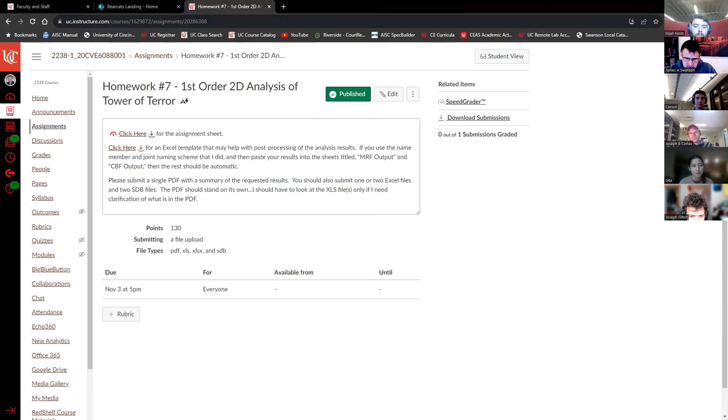There it is. And so with this worksheet, it's set up so that if you do your analysis and you name your members the way that I wanted you to, then all you have to do is paste the data in the appropriate sheets here at the bottom. Let me see, here we go, moment frame output. So you can paste your data into this sheet from the moment frames. And the next one is concentrically braced frame output, CBF output.

So if you name your joints and your members the same way and output the data the right way, then you can paste your output into these 2 sheets here, and that will basically sort all the information for you. And so I've got results due to dead load, curtain wall, snow, live, and wind in the X direction. And then I have the load combinations that I want you to consider.

And then the envelope, and the envelope is presented 2 different ways. First, it's in kips and feet units, and then kip and inch units. And it's convenient to have both of them. And then some joint output that calculates the drift ratios and things like that. And so as you're working through your assignment, it might be worth taking a few extra minutes to number your nodes and your members the same way that I did, so that you can save some time on the back end with your post-processing.

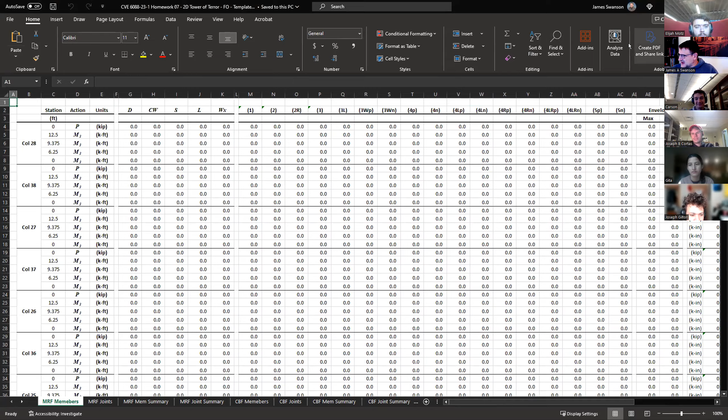Okay. Well, that being said, what I wanted to do today is pick up where we left off last time with our continuum elements, and then I'm going to go back to SAP 2000 and put some shell elements in that model and show you how to basically put in the gravity loads. And then if there's any time left over, we might launch ETABS and start working in there as well.

So looking ahead at our schedule, my goal for Thursday is to talk about matrix analysis of frames. So that'll be our last matrix conversation. And I wanted to get that in before our exam. One of the exam questions that I like to ask is, calculate equivalent end actions. And if we do that for a frame, that's a little bit more interesting than doing it just for a beam. And so I wanted to get that in before the week of the 13th.

Remember, next week, the 7th is a reading day for us, so we won't meet that day. And then after this week, we have one more class before our take-home exam. So that's on the 9th, and I plan to answer some questions you might have then, and then cover some ETABS material. And then we have our exam, and then basically 2 or 3 more classes after that, and we're done. So the month of November goes fast.

All right, so let's see. We were working in this presentation here. Okay, we were working on continuum elements in SAP 2000. We talked about the differences between plane stress and plane strain elements. The idea that these elements come in either 3-node triangles or 4-node quadrilaterals. There's different variations of those, so you can actually have a 6-node triangle or an 8-node quadrilateral or even a 9-node quadrilateral that have different types of shape functions built in, different formulations buried behind them.

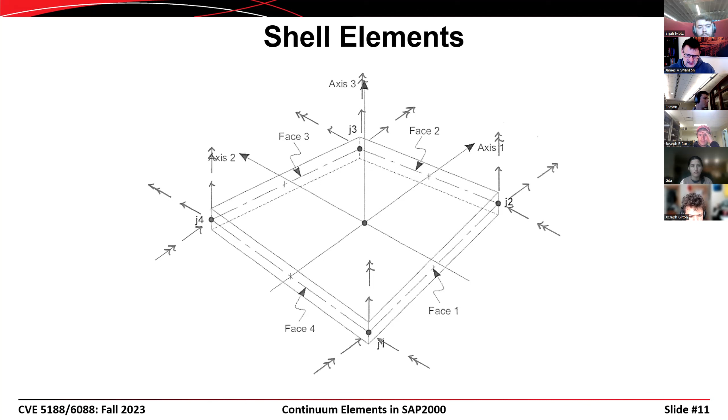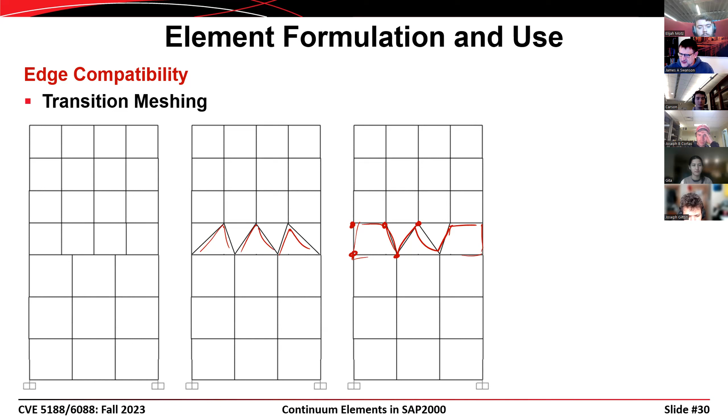All right, so we had talked about the idea that there has to be some transitioning in the meshing in order for this to work. The only place where these continuum elements are actually connected to each other is where they have common nodes. And so you need to have a transition mesh between the 2 different regions of the model in order to have continuity of action.

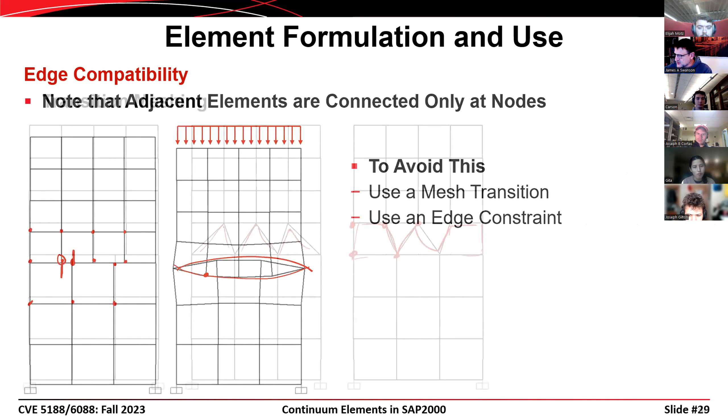So if we were to go in and push down on the top of this, then what you end up with is overlapping between these 2, because this shell element up here isn't connected to the shell element down here, except at that one node. So you have a node here on the top, a node here on the bottom, and those aren't connected to each other. And so we can use a transition mesh like that, or we can use an edge constraint like this. And those edge constraints are handy because they allow us to just define a set of joint constraints that accommodate the transition mesh.

The transition mesh is a little bit more costly in terms of time because you have to go through and do that manually. You can't always get Abaqus or SAP or ANSYS or whatever to get that transition mesh for you automatically.

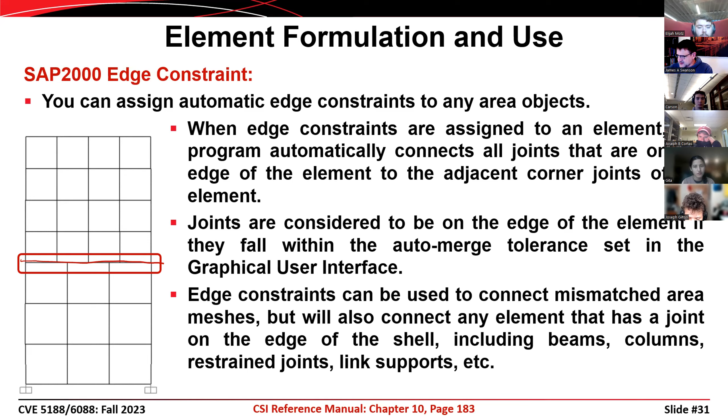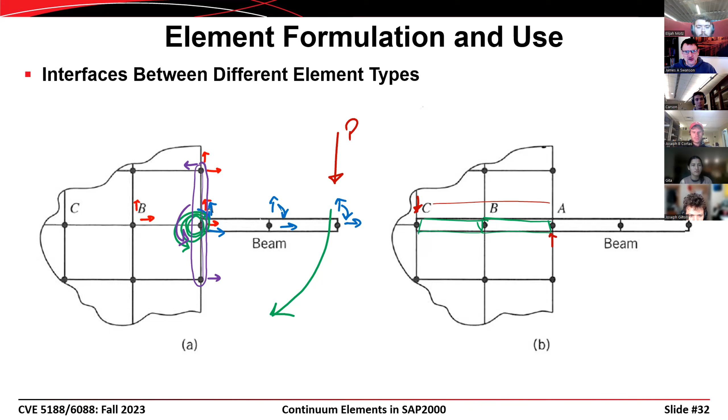Probably one of those things where it won't really click until you actually are faced with that situation. But if you come up against that kind of a situation, bear in mind that's an issue that you have to work around with these.

So when we go and use these continuum elements in SAP 2000, we're going to use most often area elements. So the beams and the columns that we've been drawing, those are frame objects or linear objects. And what we're going to do now is use area objects. Like we take a linear object and automatically mesh it into a number of frame elements, we're going to take an area object and automatically mesh it into a bunch of shell elements. So an area object can be larger, and then you can set the automatic meshing so that it's meshed into a number of smaller shell elements.

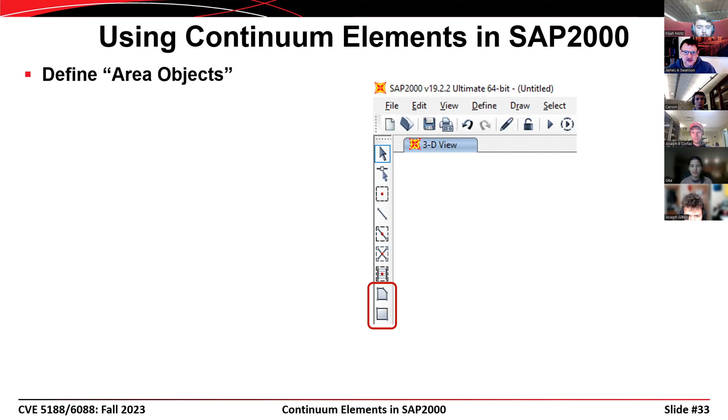And so the area objects are on the toolbar and they look like that. The first one is for an irregular area object, and the second one is for a rectangular area object. Occasionally you end up with an irregular shape depending on the particular geometry of the structure you're modeling. You also have to define the area sections, much like when we define a frame object, we have to tell it whether it's a W36 by 150, or maybe it's a rectangular concrete beam, 18 inches by 12 inches. You have to do the same thing for the shells as well.

And so you go into the define menu, section properties, you go to area sections, and then it gives you a window that looks like this. You can define the area as either a shell, a plane, or an axisymmetric solid, and that's what those three options are for. We talked about these different types of elements that exist under the idea of continuum elements. And we're almost always going to use a shell element when we do our modeling.

In the past, in this class, I played around with modeling a dam cross-section with plane elements, but it's kind of a right turn from what we are doing with buildings and bridges, and so it doesn't really fit in well with the cadence of the class. And then we always run out of time anyway, so I haven't done that in the last couple of years.

Another option would be you could actually model a wide flange beam using shell elements. You use a series of shells for the top flange, a series of shells for the web, then another series of shells for the bottom flange, and you can get a high resolution model of a beam using those shell elements. And there are some applications where that's preferable, but that's pushing SAP to its limits with respect to doing continuum modeling. If you're going to do that type of work, you're probably better served going into something like Abaqus or ANSYS instead. All right, so second step is to define the area sections.

Okay, the next is to assign the area section to the area objects. So you define where you want the shells to be, you define what you want the shells to be, and then you assign the shell section definition to the area object definition. That's rather intuitive after you've been working with SAP and you understand that you have to assign a section to all the frame objects as well.

Then the next step is important. It's not strictly required, but in almost every case you would want to do something with automatic meshing associated with the area objects. So when we go and look at a framing system for a building, the beams might be spaced at 12 feet, and you certainly wouldn't want to have a shell element that has dimensions of 12 feet by 32 feet. One element that's that large isn't going to give you the analytical results that you're looking for.

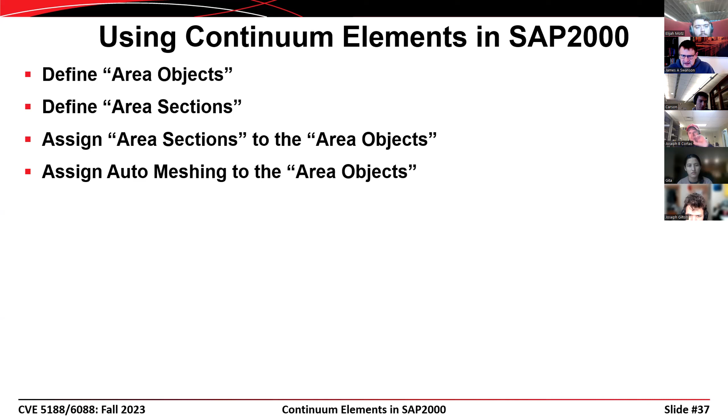What you're going to want to do is break that up into a number of smaller elements, and in order to do that and do it conveniently, you'll want to use the automatic meshing. And so you set that much like you do automatic meshing for a frame element. You go to the assign menu, you go to the area, and then you go to automatic area mesh.

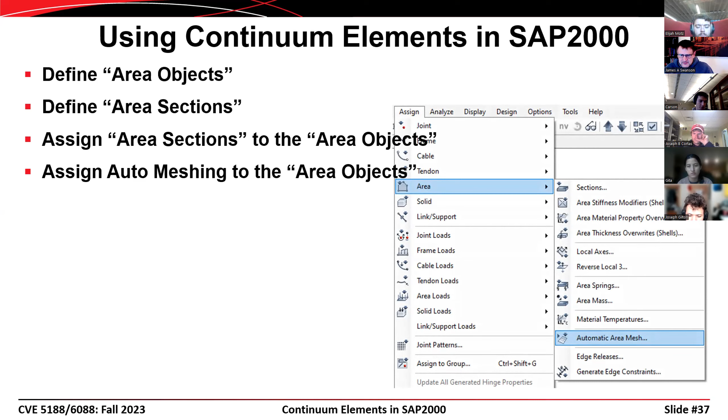Now, when you look at the dialog box that comes up, it's very involved. And there's a whole 2, 3, 4 page handout that I have that I'll give you on this. But I should have posted it before class, but I forgot about it.

But in almost every case, if you select these options here, that gives you usually the results that you want. I use the cookie cut based on straight line objects that are in the meshing groups, and I extend all the straight line objects to the area edges. And so what that does, if you window over an area object over the floor framing at a given level in a building, it'll automatically mesh that area object so that the edges of the resulting elements line up with the beams that are in that floor slab. And so that's usually what you want.

And then I also have a sub mesh option over here, rather arbitrarily. In this case, I've selected that I want elements that are no larger than 12 inches by 12 inches. And so that's not a bad number. If I have floor beams spaced at 12 feet, like I do in the Tower of Terror, then that's going to give me 12 shell elements between each floor beam. That's not a lot, but it's not too few either.

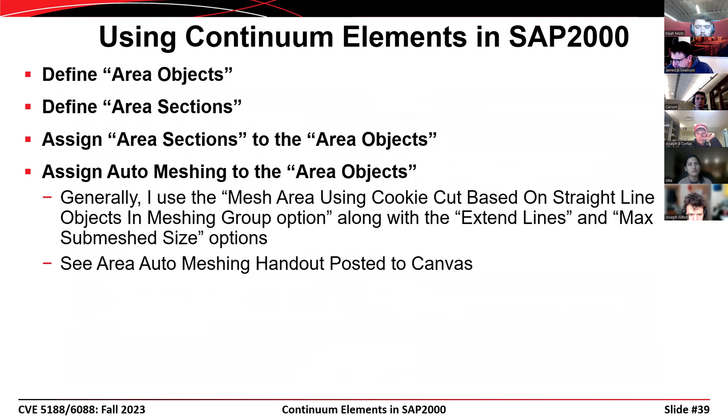If we were looking for behavior of the deck itself, we might want a higher resolution mesh. But since we're not really looking for the behavior of the deck, instead we're looking for the loads that are in the steel members, then using a mesh that is rather coarse is satisfactory for that particular objective. Right, so there's the automatic meshing that I use. Yeah, I'll post that. I forgot to post it before class.

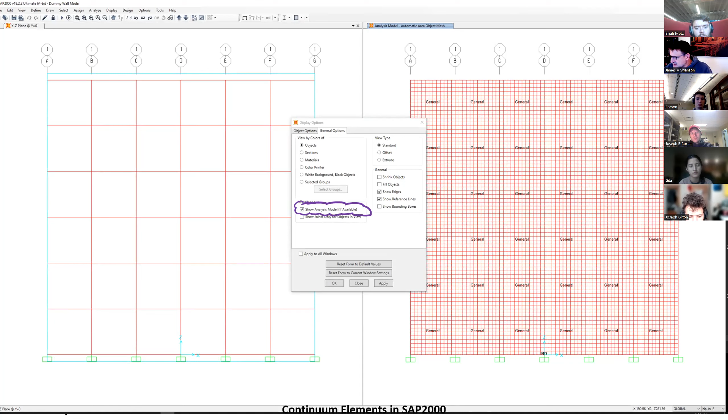And so the idea is if we go in and window over a series of members like this, then we can automatically mesh it and get it to pop up with the straight line objects. Now, there's a difference between the model that we use for design and the model that is used for analysis. And so if you want to see what type of automatic meshing is going to happen, then you go to your display options dialog box and show the analysis model, and then it'll go through the automatic meshing. Right. Yeah, and there's that.

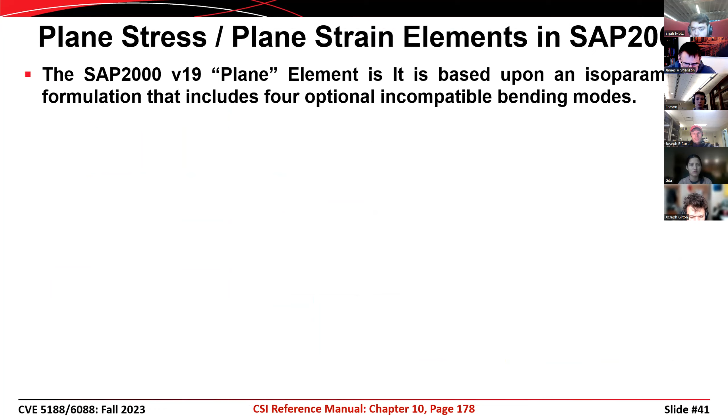All right, now let me skip over this for now. The plane stress and the plane strain elements, I don't think we need to cover those. Yeah, here's one. I did do a model of a shear wall with these plane stress, plane strain elements. I guess I'll cover them just to be complete, but I'll cover them quickly.

Okay, so the plane stress, plane strain elements, they have a use when you're modeling things like walls, or maybe you want to do a model of a beam and you want to look at the stresses in the beam. And in this case, you could actually look at stresses that are based on the finite element formulation instead of stresses that are based on Bernoulli bending or Euler bending instead.

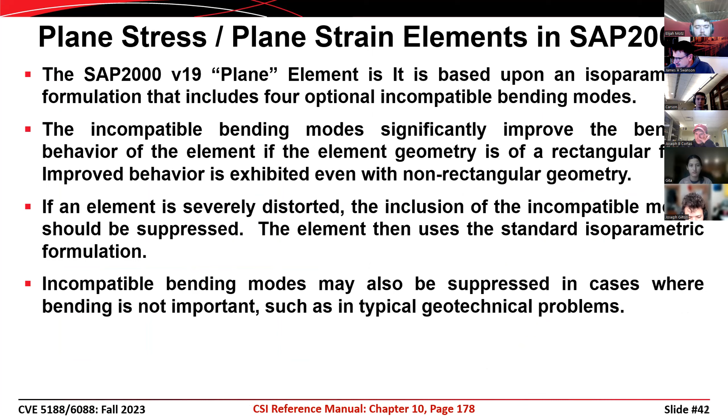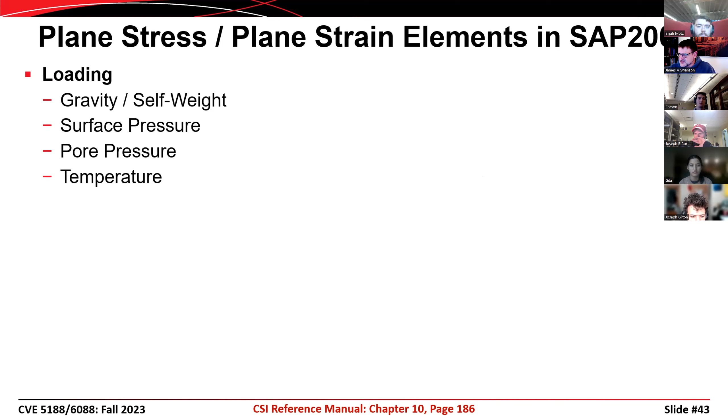And so there's an option for including incompatible modes. When you look at a beam that's made up out of these plane stress, plane strain elements, you end up with a propensity to have shear locking involved with them, and that's where the incompatible modes come into play. Plane stress and plane strain elements have loading that can consist of self-weight or gravity, surface pressures, pore pressures, or temperature. And you can also put point loads at the joints that are within the model.

The output is based on 2x2 numerical integration, Gauss quadrature that I mentioned last time, and it gives you stresses in the local element coordinate systems. So you get in-plane stresses in the 1,1 direction or the 2,2 direction. Those are sigma values, normal stresses, so that would be sigma 1,1 or sigma 2,2. You also get a shear stress that would be tau 1,2. And they use S for all three of them, so you have to be familiar with the notation.

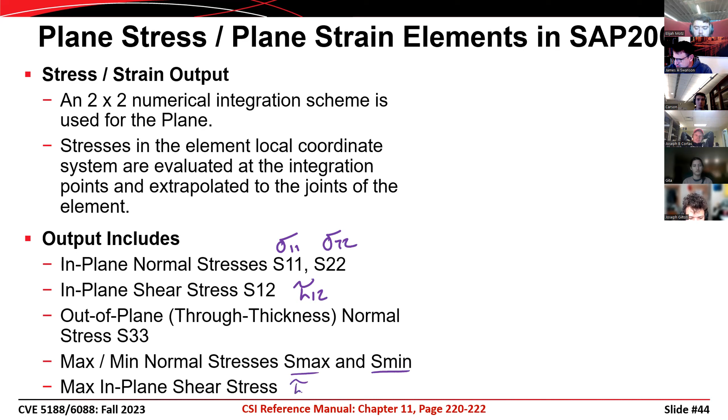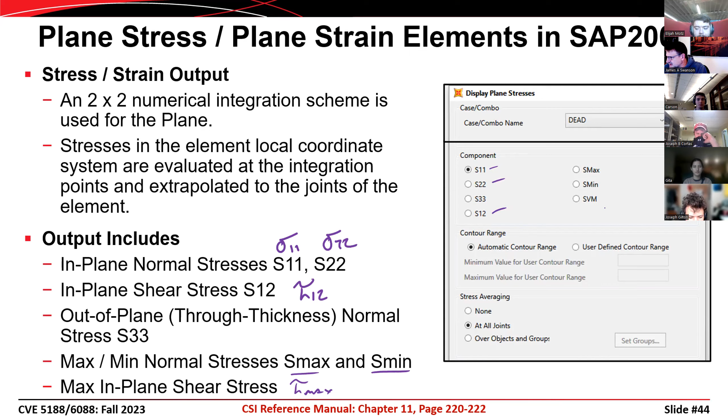You also get an out of plane stress in some cases, depending on whether you're using plane stress or plane strain. And then you can also output the maximum and the minimum stresses as well, or the maximum shear stress too. So here's the output definition: sigma 1,1, sigma 2,2, tau 1,2, S min, S max, and then the maximum shear stress.

And those values are based on a Mohr's circle analysis of the state of stress that's in each one of the elements. And so you might have a value where this is sigma 1,1, tau 1,2. This might be sigma 2,2, tau 2,1. And then the maximum stress is here, the minimum stress is there, and then the maximum shear stress would be up there.

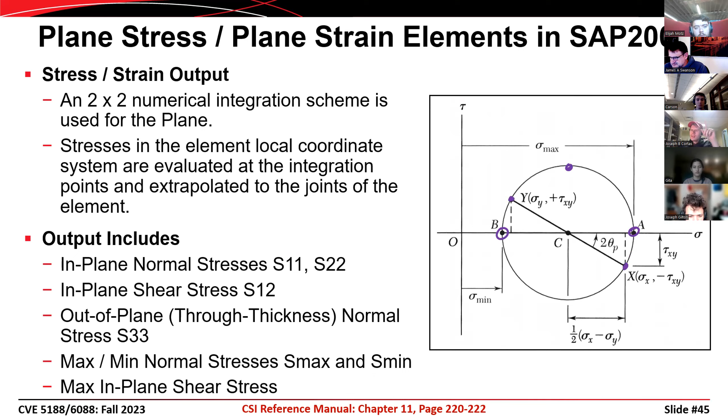All right, here's the shell element formulation. You can have a 3 or a 4 node formulation. The 4 node element does not have to be planar. You could have the 4 nodes out of the same plane, but it shouldn't be too far out of that plane in order to give good performance. Each element can be loaded by gravity or uniform loads in any direction, surface pressure, or strain or temperature change. There's also a uniform to frame option that's available for the shell elements that's very useful.

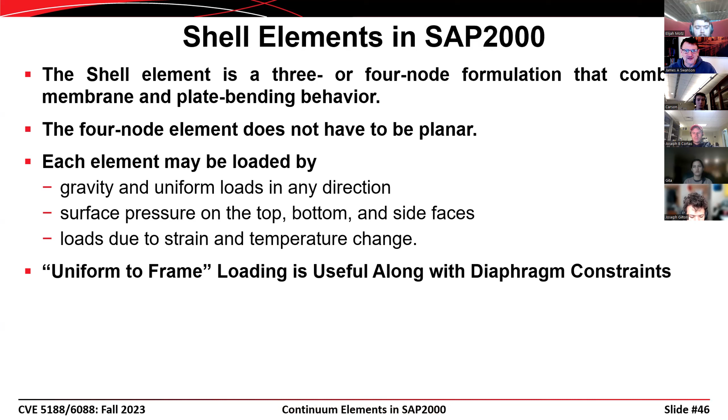In a lot of cases, we don't necessarily need the shell elements in the model to try and capture some behavior. We just want the shell elements so we can put the gravity loads on there. So we can put the dead load from the floor, or the snow load, or the live load from the floor on there. And in that case, a uniform to frame loading option is very, very useful to us.

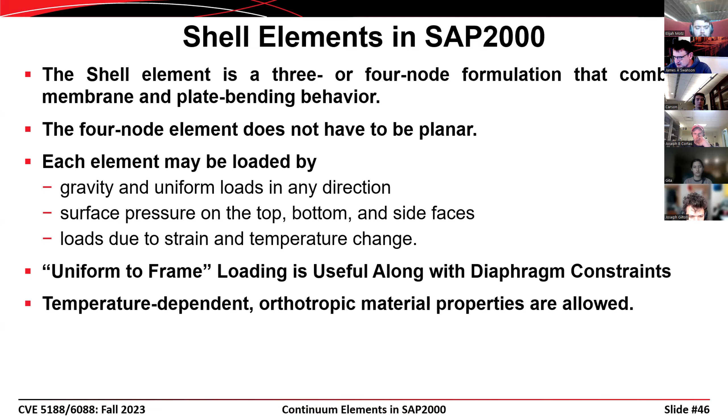And when you define the way the loads are distributed, you have to know whether the 1 axis is perpendicular to or parallel to the members that are supporting the shells. And if you get it wrong, then the behavior that you're expecting might be different than what you get. Excuse me.

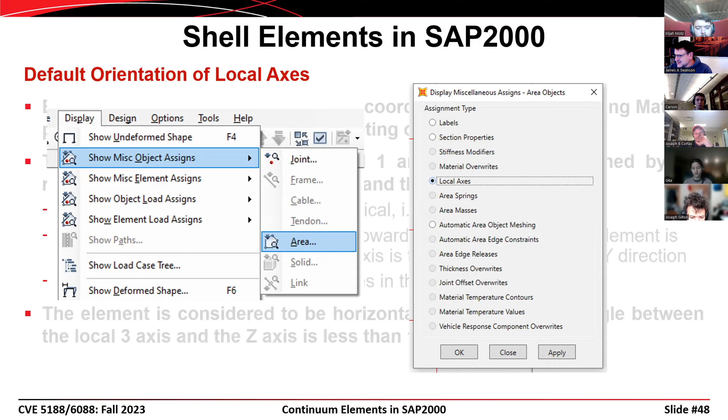All right. So if you want to show the local axes, I think we talked about this in the context of frame objects, but in area objects, you can go to the display options, show miscellaneous assignments, and then go to the area objects, and you can show the local axes. And so it shows a series of red, white, and blue axes. In this case here, I've got a wall that I modeled. Red, white, and blue corresponds to 1, 2, and 3. They can't show a white, so it's red, green, and blue instead. So this would be the local 1 axis here, this would be the local 2 axis, and then the 3 axis is coming out of plane.

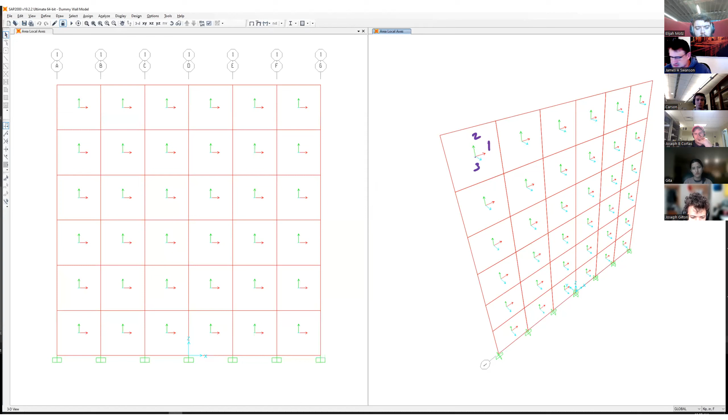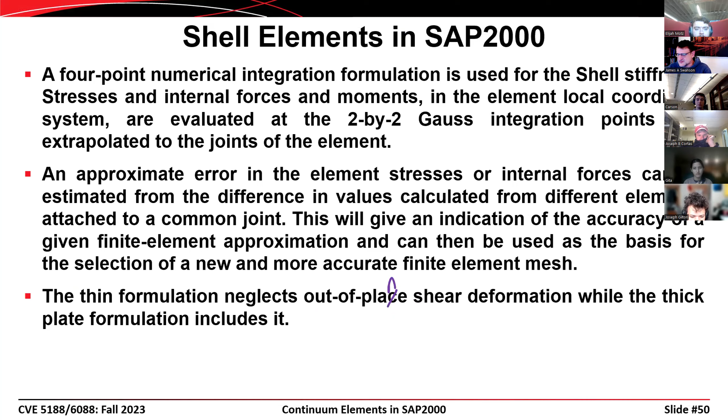Most buildings have a rather thin floor slab, something in the order of 6 or 8 inches. Maybe if you get into a bridge deck where you have like a 12-inch or 16-inch thick bridge deck, that would be very thick even by today's standards. Then maybe that would be a case to include it. But probably in most cases, we can ignore that.

Then you have the homogeneous versus the layered. And this is a reference to that watch and learn that I mentioned earlier. You can use a layered shell element formulation to model shear walls.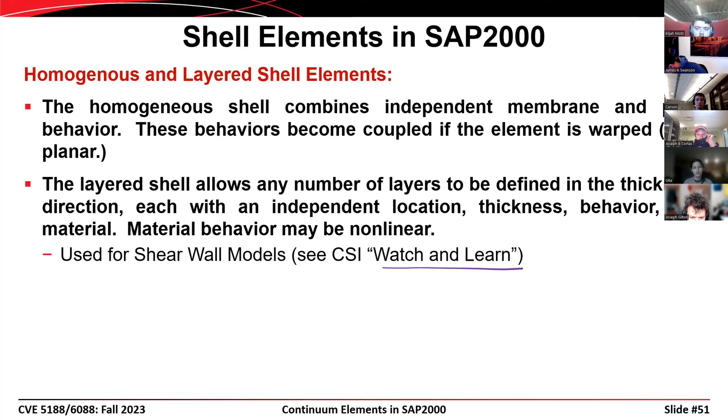All right, so what I want to do at this point then is shift gears, change computers, and go over to SAP 2000. So that'll take just a minute. You can go over here. Share that window. There we go. And there is the model that I have of the Tower of Terror. All right. So this is basically where we left off last time. So I'm looking at the first story of framing. So that's floor 2 right there.

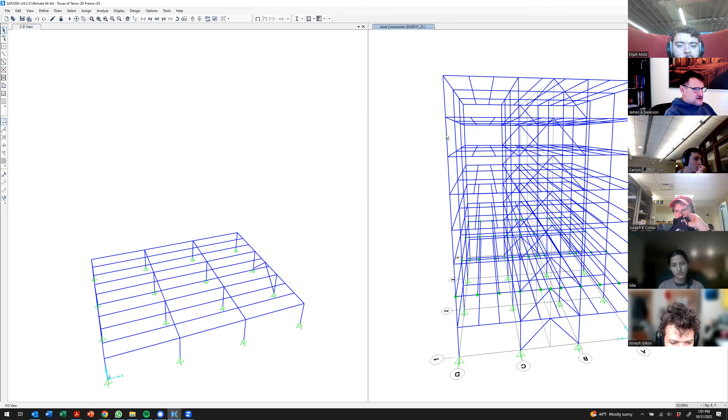Let me actually go over here in the window on the right. And what I'm going to do is take a look at the second floor framing plan in a 2-dimensional view. So I'm going to go over here on the right. I'm going to go to view, set a 2D view. I want to look at the XY plane at Z equals, I could type in 12.5 feet, or I could just click there. That's the second floor framing. I hit apply, and then there's the second floor framing for me.

All right, so I've got to do 2 things. I've got to define the geometry of the shells. I've got to define the section of the shells. I'm going to define the section first, because then I can assign that section to the area objects when I draw them. So let me go to define areas. I'll say I want a new shell element. Let's call this floor slab.

And so I'm going to use a thin shell element formulation. Let me go ahead and use a membrane thickness of 0.5 feet, a bending thickness of 0.5 feet, and I'll just keep this material that I have here. Using concrete, normal weight concrete is satisfactory. And I think everything else will be fine from there.

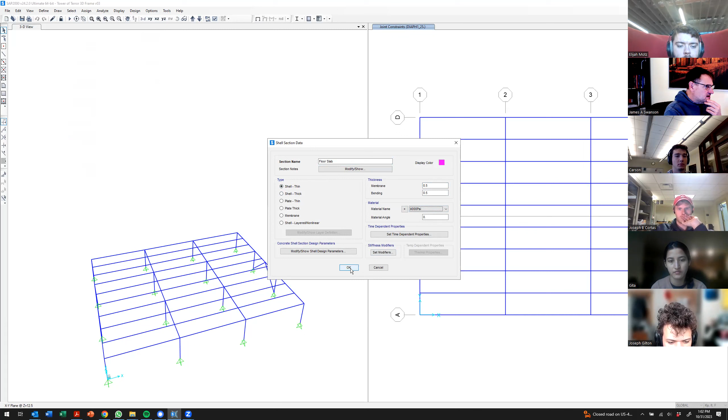Okay, hit OK. Now what I can do is I'm going to draw one area object that represents the entire floor at that level. So I go in like this. I'm going to draw it from upper right to upper left to lower right. And you can see that area object there. It's outlined in red. And then I'll hit escape to exit out of that.

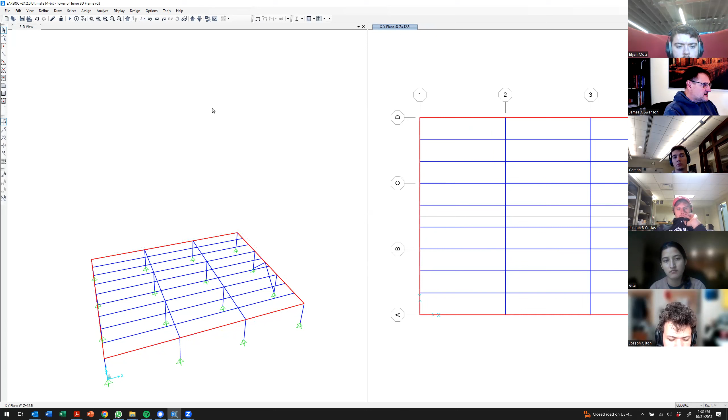Now, if you want to see that area object a little bit better, what you can do is go in here and go to fill objects. And so now it fills in that area object with red, so you can see it there. Or you can go in here and shrink that object so that you can see it's actually shrunk down from its edges. It's hard to see those area objects sometimes. You can also go in here under areas. You can put the labels in there as well, which sometimes helps.

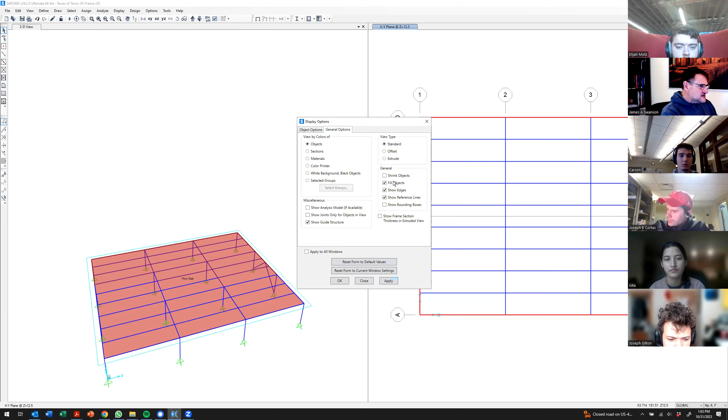So that's area object number 1. We can put the sections in there. So that's floor slab. Or we can go over here and I can draw the local axes, and that will be helpful. So let me not fill that object. And so now the one direction is parallel to the joists that are in there. Now, let's see. I want to check one thing. I'm going to go up here and go to the documentation. And let me go to search instead. There we go.

So the uniform to frame option works in one of two different ways. I wish I could get rid of that highlighting. You can have it set up so that the area objects behave as a one-way slab or as a two-way slab. And I'm looking up to remind myself, when I put it in one-way mode, does the load distribute in the 1 direction or in the 2 direction? And I can't remember which that is. So

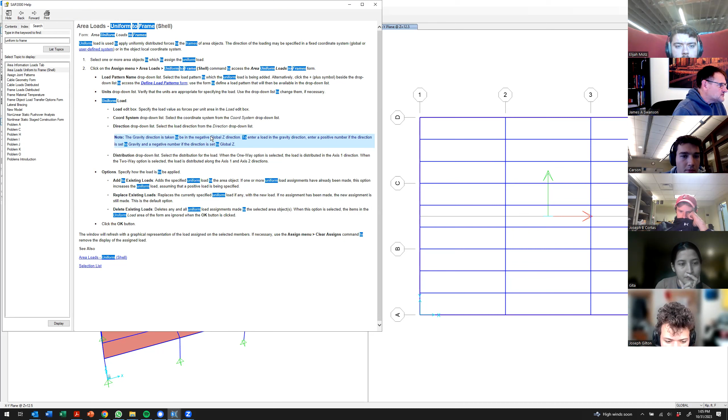Select the distribution for the load. When the one-way option is selected, the load is distributed in the axis 1 direction. When the two-way option is selected, the load is distributed along both the 2 and the 1 directions. So what that means is when I define one-way slab action, it's going to carry the load in the 1 direction to the supporting members. So I want the 1 direction, the red arrow here, to be perpendicular to the floor beams.

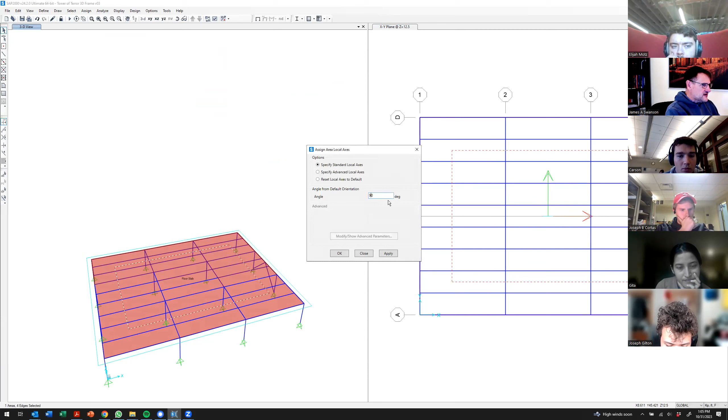So I can do one of two things. I can either delete that area object and redraw it, or I could come in and change the local axes. So let me go and do the latter. I can go in here to assign area and then local axes, and I can define an angle of 90 degrees. And when I do that, you see now the 1 axis of that area object is going perpendicular to the floor beams.

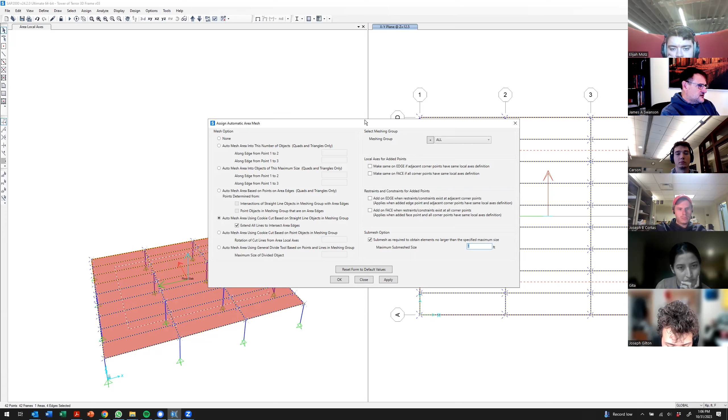All right, I'm going to do one more thing. I'm going to select all of the members that are in that floor slab. And then I'm going to go into the assign menu, go to area objects, and then automatic area mesh. I'm going to auto mesh using the cookie cutter based on the straight line objects that are in the meshing group. I'm going to extend all those lines to the area edges, and then select 1 foot for the size of my elements. All right, so I hit OK. It gives me a little indication here that it's doing automatic meshing.

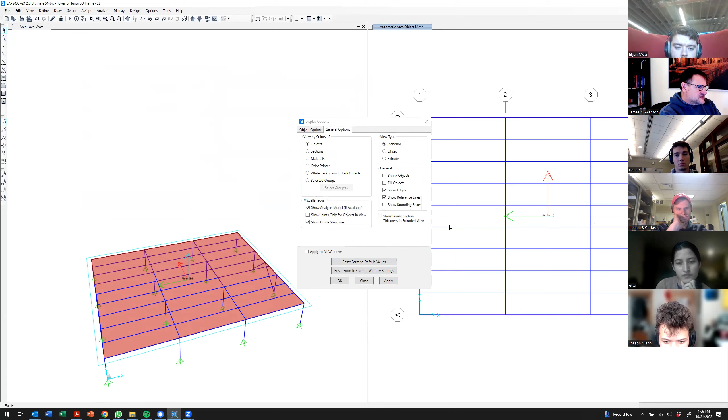And now if I want to see what the actual elements look like over here on the right, I can go to my general options and show the analysis model. Okay, the analysis model hasn't been generated yet. It's asking me if I want it to do that. It asks because for larger models, it takes a non-trivial amount of time. And even for this model, it takes a little bit of time. So it took that one area object and broke it down into all of those shell elements. And so all of those shell elements look like that.

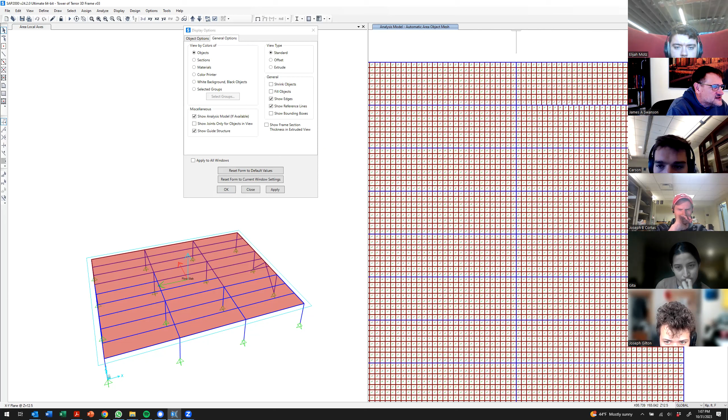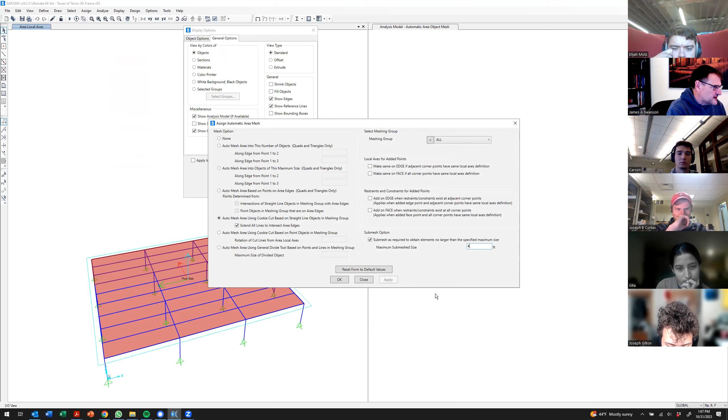All right, that's kind of strange. I wonder why it broke it down into a different number of elements on the top side than on the bottom side. That's unexpected. Let me go in and do something else here. Let me break that down into a smaller number of elements. Let me go to assign area, automatic mesh, and instead of 1 foot by 1 foot, let me specify 4 foot by 4 foot. Okay. Oops, that's not what I wanted.

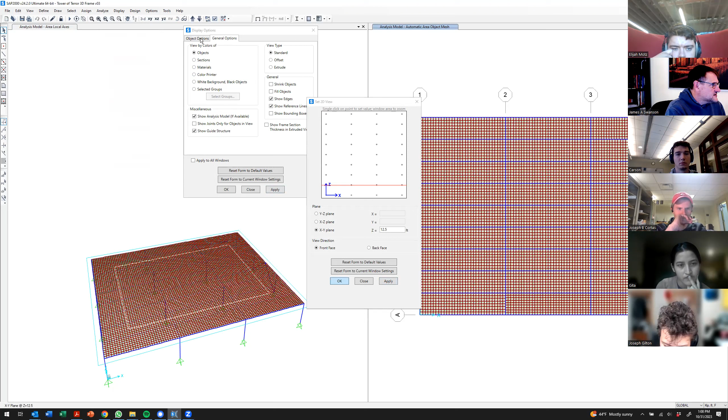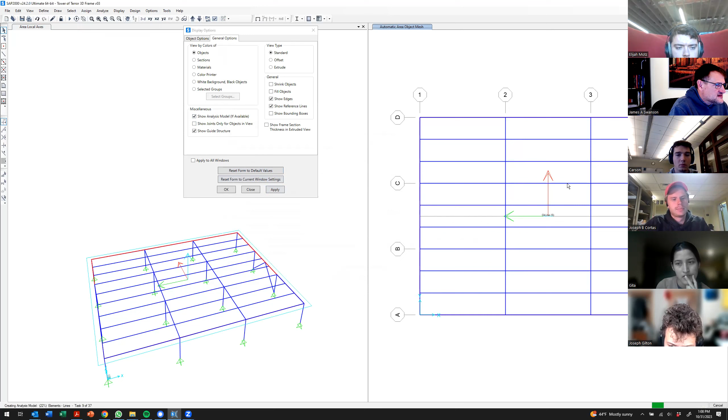View, 3D view. Where did it go? Hit apply. Okay, there we go. Let me look at what it has for automatic meshing. Yeah, submesh is 1, so it didn't take that last edit. So let me go in here again, select my area object, go to assign, area object, area automatic mesh, and hit apply. There we go. Now it killed the analysis model. Let me go ahead and hit apply again. There we go. And so now it has larger elements.

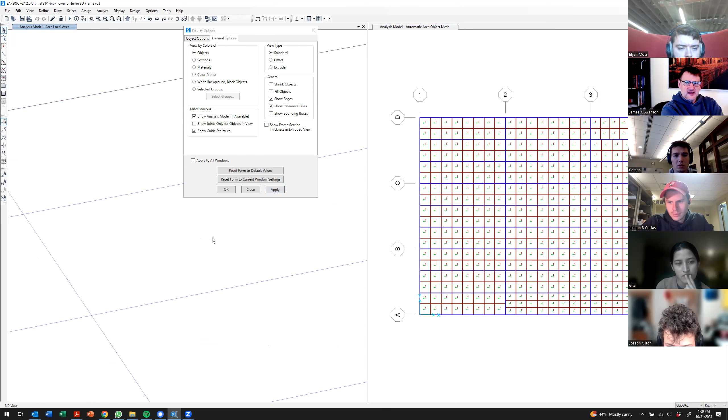So one of the things that's important is, let me go ahead and do that same thing over here. If you actually want the shell elements to be connected to the beams that are supporting them, and you do, then you have to have the beams set up so that they automatically mesh at every location where there's a node. There's going to be a node at every corner of these shell elements, so these beams all have to be set up to automatically mesh and connect at those nodes. If you don't do that, you'll get behavior that's unexpected.

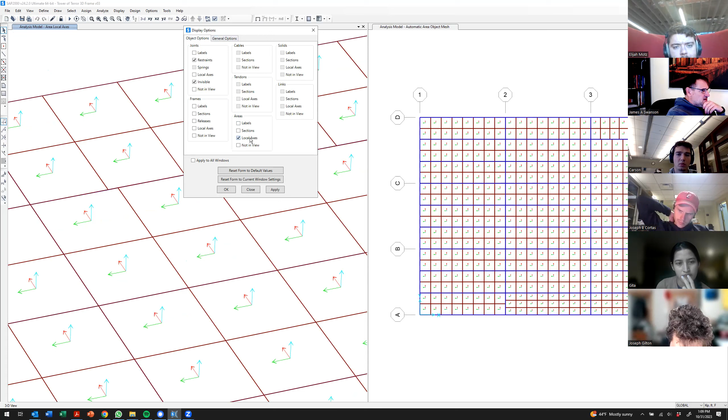So what I'm going to do over here on the left view is say that I want the areas to be not in the view. So there's area objects there, but they're just not shown. And then I'm going to right click on that supporting beam and look at the automatic meshing that's associated with that beam. The properties, materials, local axes. Huh. Wonder why it didn't give me automatic meshing. Did I miss it? Local axes.

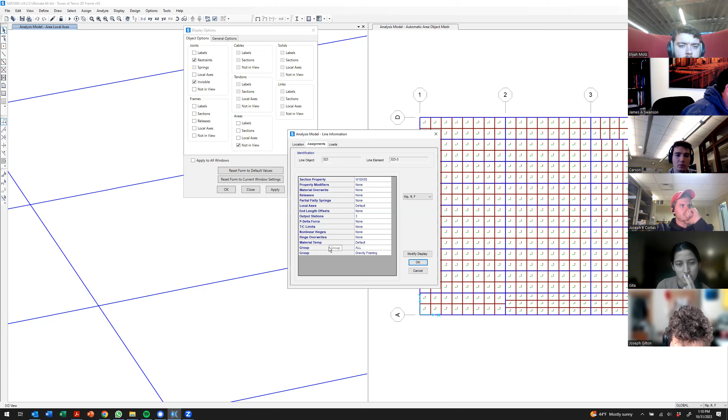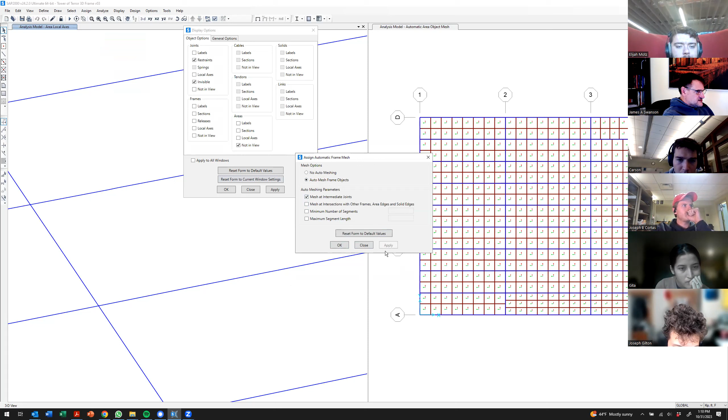So maybe I didn't define that. Let me go. Oops, I did the same thing again. Go to assign, frame, automatic meshing, at intermediate joints. Yeah, okay, it's already set. All right, well, let me do this. I'm going to go ahead and load that area object.

So let's go ahead over here. I'll select that area object. Note when I click on this, I can't select one of these elements. I can only select the area object that's submeshed into those elements. I can go up here now to assign, go to area loads, and now I can put a uniform load on that. And so I can put, say, a dead load on, and I can type in 65 pounds per square foot, and that converts to 0.065 kips per square foot.

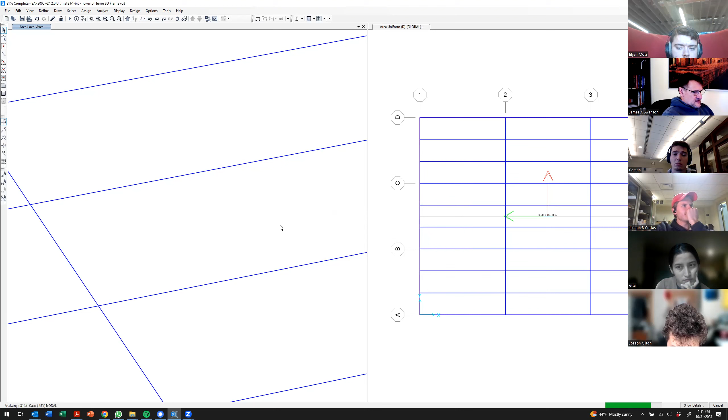Let me hit apply. And then let's go ahead and run the model once and see what kind of results we get. Okay, note that the model takes a little bit longer to run now because it has a lot more degrees of freedom in it than it did before. And I'm getting an error. Yeah, let's ignore that for now. I shouldn't ignore that, but let's ignore that for now.

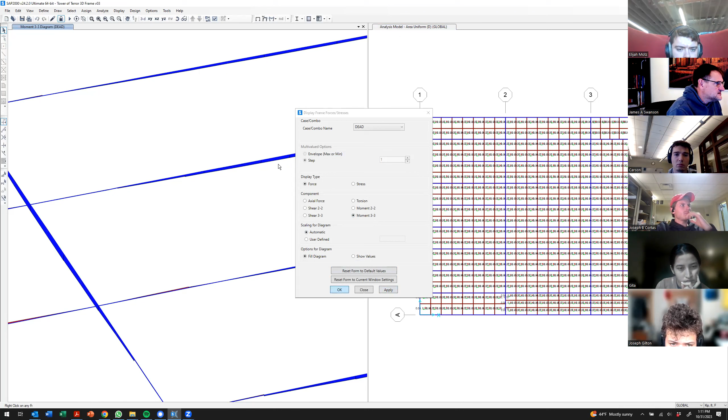What I want to do is go in over here on the left and show the bending moment diagrams due to dead load. And that dead load moment diagrams that are shown there are coming in from the shell element loading. So let's go here to display. Options, go to moment diagrams on the tension side. Now we're getting a dead load moment diagram for that beam.

So I can go in and right click on that just like we did before. And bring up my beam object. And so you can see the bending moment diagram that is in there. So I have a maximum moment in that beam of 38 kip feet. It's not exactly what you would get from WL squared over 8, but it's not too far off.

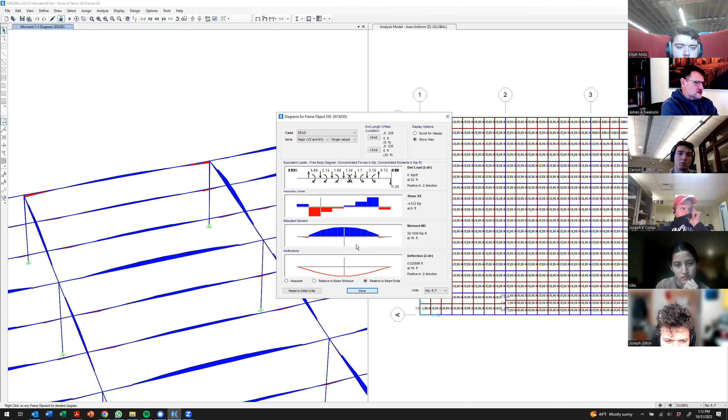Now we have a little bit of an aberration here at the end, and that's because the shell elements that we put in are continuous over the girder, right? The beam is pinned at the girder end, but the shell elements are not. And so if we want to, we could be a little bit more sophisticated in defining our mesh, or if we go in and define a zero bending thickness, then that'll take away all of the bending action in our mesh, but we don't necessarily want to do that.

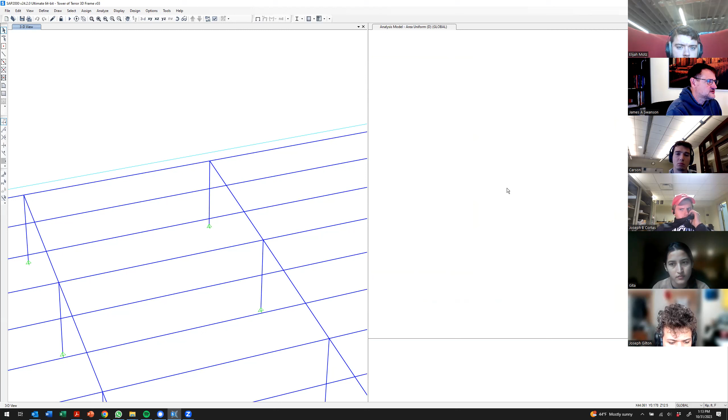Now, I find it odd. Computer's too slow for this. Do this instead. Go over here. Let me zoom in a window instead. Control W, show the analysis model, shrink objects. Oops, I need to uncheck that.

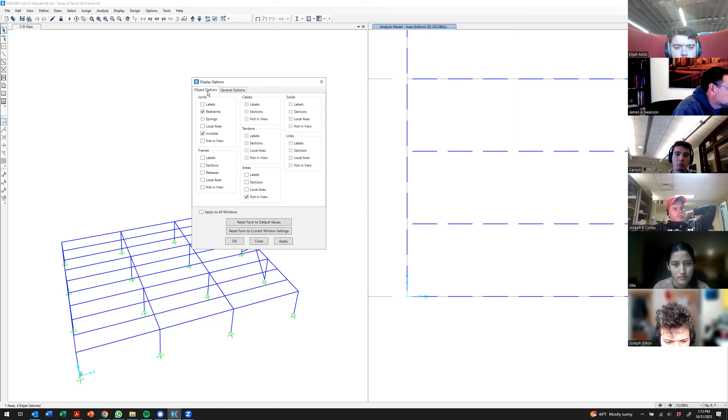There we go. So I'm not sure why this is happening, but it's giving me 2 elements per bay in some cases, and then over here it's giving me 3 elements per bay. And I'm not sure why it decided it needed 3 elements there. That's part of the quirks you get out of the automatic meshing. Maybe it decided that the distance between this floor beam and that floor beam was just a little bit too far. Maybe it was 8.001 feet. So when it said I need at least an element no bigger than 4 feet, maybe that triggered some kind of, that's odd.

I think it did the same thing up here as well. Yeah, and here it adjusted the length as well, which is strange. I'm at a loss as to explain that. And that's part of the automatic meshing thing that's rather enigmatic.

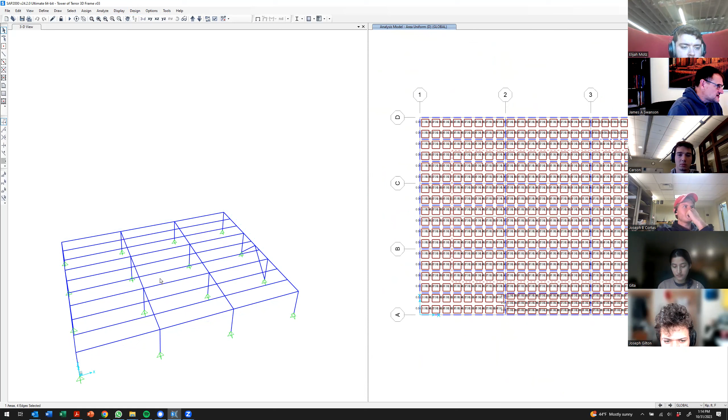What I am going to do though is one more thing here. I'm going to go in and select that area object. I've got to make sure it's in the view over here before I can actually select it. Hit apply. Now I can select that area object. And if I want to, what I can do then is copy that. And so I can replicate that, or I can copy it. Hit Control R, but I guess it didn't take. So let me go here to edit.

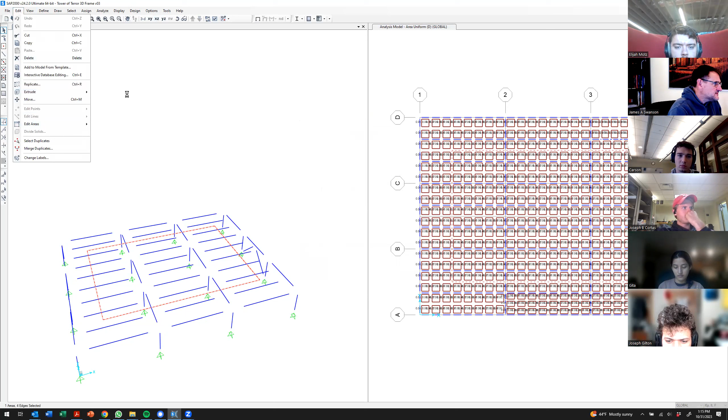There we go. I guess I didn't have that selected. There we go, to replicate. I can replicate it in the Z direction at 12.5-foot increments, and I think it's 7 copies of it that I want. Hit apply, hit close. I can go over here and set a 3D view, and now you can see I have that floor slab modeled everywhere.

Now I probably want a different slab at the roof level. It's not common that you would have a 6-inch concrete slab defined for the roof unless you're designing it for future expansion or something like that. But I won't take the time to define that right now. Okay, so there's one other option that I wanted to define. Let me undo that. I'll take away those copies.

Let me go in here and I'm going to change the load that I had. So I had an area load, uniform shell loading. I'm going to delete that. So I'm going to delete existing loads, hit apply. That load is now gone.

I'm going to go in and I'm going to assign an area load, but I'm going to use the uniform to frame loading instead. And let me go with dead load again. We'll go 65 pounds per square foot again. And I'm using one-way load distribution and 65 pounds per square foot. So go like that, hit OK. Let me run it now.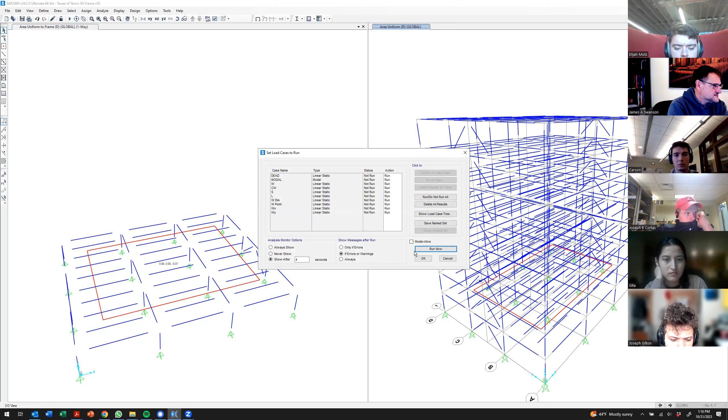Okay, notice that I did not get that error. Okay, never mind, I did get the error. Let's go in and look at the bending moment diagrams that come away from that.

Yeah, that was worth a laugh. I'm glad you guys were paying attention.

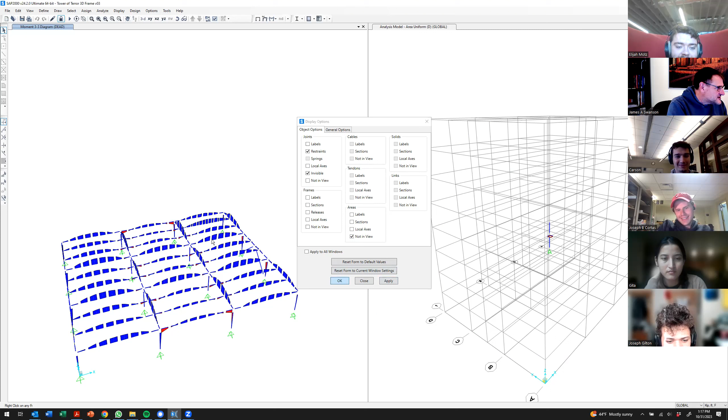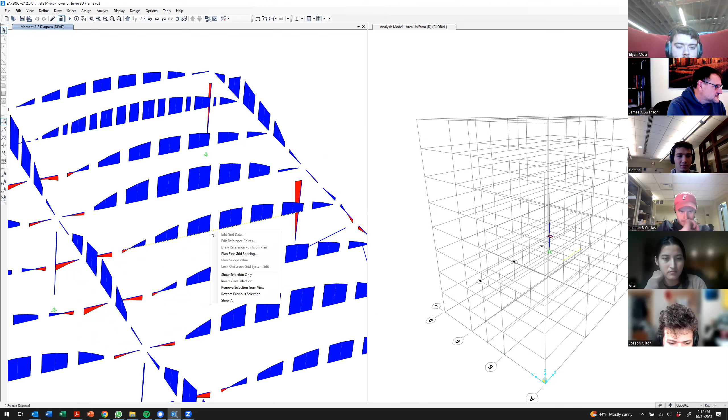Spoke too soon. Okay, now let me go in and look at that beam. I'm going to have to zoom in on it. Come on. There we go, finally. There, now you end up with, I think it's a different beam, that's why I'm getting a different moment. But what it's doing is it's using that uniform to frame.

It actually takes the load that was specified for the shell elements, and it uses a tributary width or a tributary area approach, and it basically takes the load that would be applied to the shells and it puts it directly on the frame elements that are supporting the shells instead of putting it on the shell elements themselves.

And so if we want to now, this is another thing I didn't rehearse beforehand, we can actually go in and define 0 thicknesses for the area objects and rely on our joint constraints instead. There we go. And so I can go in now and define, say, for that area object, let's see, assign area property modifiers. There it is, area stiffness modifiers.

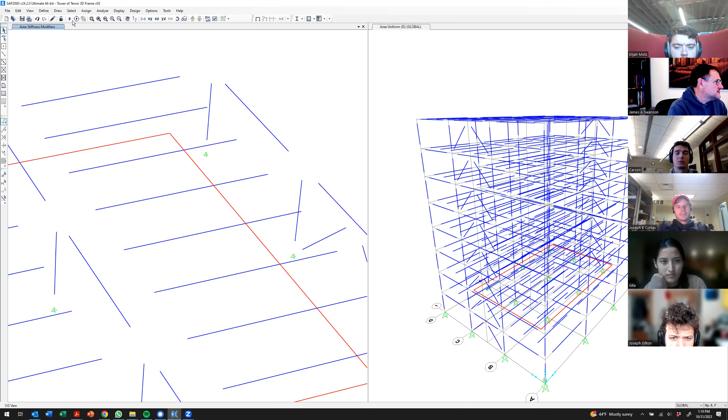So I can go in and set all of these equal to 0, and it basically takes away the bending stiffness that I have associated with those shell elements. Close that, close that. Now if I go in and run this again, we'll see if it changes the shape of the bending moment diagram that I was looking at for that beam. Yeah, now I'm getting more errors.

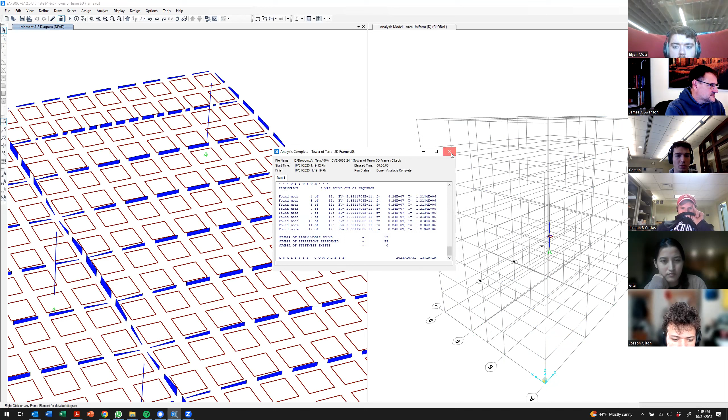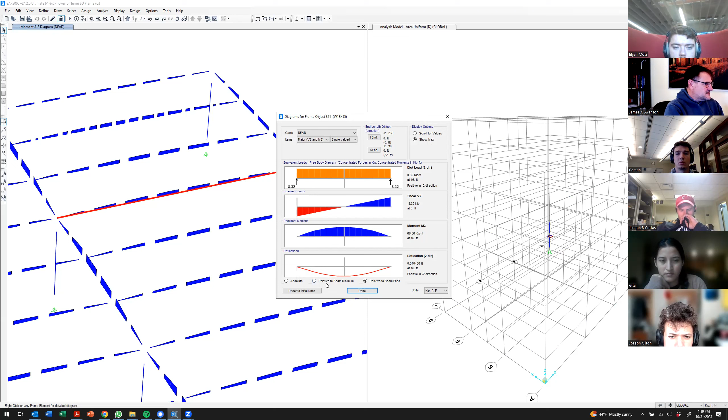Okay, let's take away the shells. And now we're getting a different bending moment because the shells aren't participating in the resistance of the load. All right, so that's enough for now.

You guys, this is beyond what you need for homework number 7. Homework number 8 is a matrix analysis. So this is going into what you would need for homework number 9. That hasn't even been formally assigned yet. So we'll go ahead and break off of this for right now.

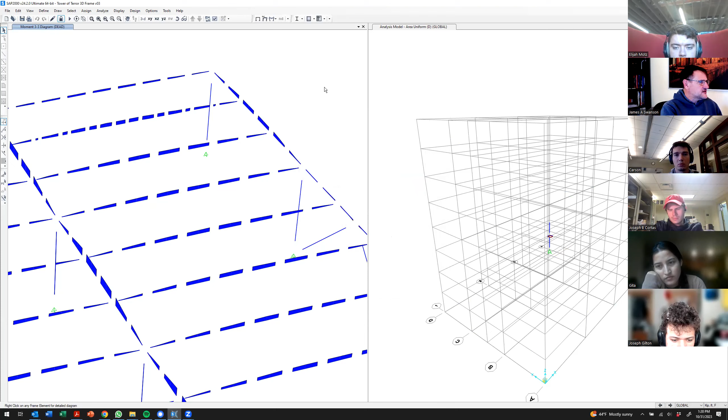And what I'll do for the last few minutes is launch ETABS instead. I better close SAP or that's going to lead to all kinds of resource issues on this computer. Now, I know Maggie did a little bit of an intro, so this might be a bit redundant with what she did, but I'll go ahead and start from scratch anyways, and start doing a model of the Tower of Terror in ETABS.

Okay, and one of the things that ETABS is really good at is modeling buildings that have vertical regularity. So if every floor is the same in a structure, that's where ETABS really shines. So, I'm going to generate a new model. I'm going to use the built-in templates that are available. I'll use AISC 15 as my steel selection database.

This particular version of ETABS is a little bit older, so we don't have the option of using ASCE 7-22, but we've been using ASCE 7-16 anyways. So there's the 16 edition of the AISC spec, the 14 edition of ACI 318. Go ahead and click there. So I'm going to use a steel deck.

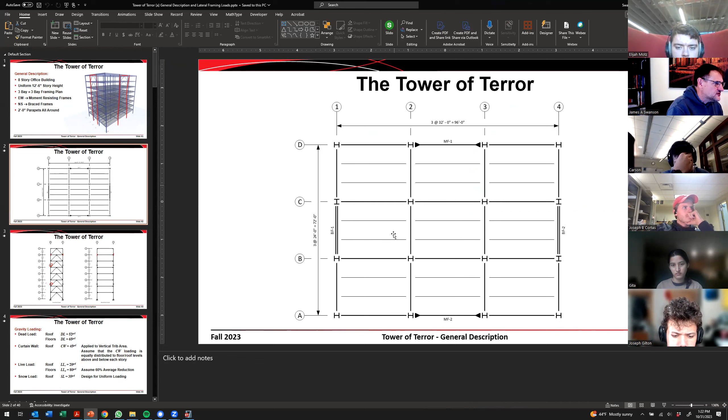Model. There we go. And so I can define the overhangs that I have. I'm going to define it with 0 overhangs. That's not realistic, but that's consistent with the way that I'm modeling this building. So I have bays in the X direction, 1, 2, 3, bays in the Y direction, 1, 2, 3, and I have a 32 and a 24-foot bay width.

And so secondary beams are going to be spaced in the X direction at 8 feet. They go in the X direction. Moment frames, none. Restraints at the bottom, pinned. Floor diaphragm is rigid. And so now we can put in our live loads, so 65 and 80.

Right, we can define our decking if we want to. This is a bit more sophisticated. You can actually go in here and define the type of metal decking you have. So it's giving us the slab depth, the rib width, and all of that. So if you want to be specific, maybe you're using a specific version of Vulcraft decking, you can go in and define that. And it has a good preprocessor that accommodates that. I'll just leave that set as the default. We'll hit OK. Go on to the next part of it.

Okay, so I'm gonna have 8 stories. Typical story height is 12 foot 6 inches. The bottom story height is often different in a building, but in our case, it's 12 foot 6 inches. I have 4 grid lines in the X direction, 4 grid lines in the Y direction. The spacing in the X direction is 32. The spacing in the Y direction is 24.

And we can change our grid labels if we want to. So let's see, in the X direction, I want it to be numbers, 1, 2, 3, and 4. In the Y direction, I want it to be letters, A, B, C, and D, and I want them labeled from bottom to top. We can put in custom story data if we want to, but we don't need to do that at this point. Let's let it chug away at this.

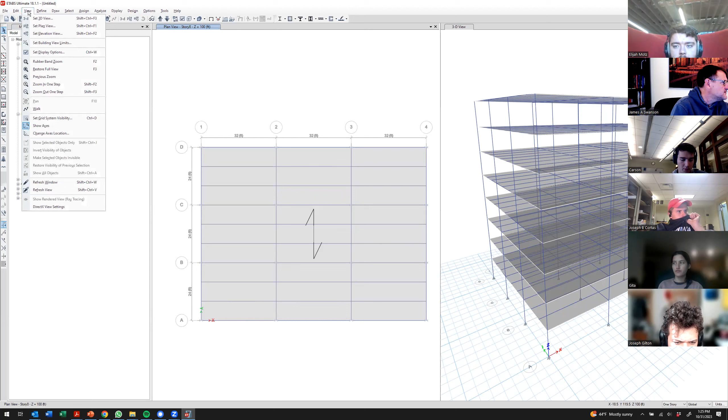So there's a few things that are missing here. For example, we don't have the braced frames in framing line 1 or framing line 4. We don't have the moment frames in framing line A or framing line D, but we can define those. If we go up here, we can go to our view and set an elevation view in this window. So I can set an elevation view of framing line A, for example. And then I can go in and define the moment connections that would make up my moment resisting frames.

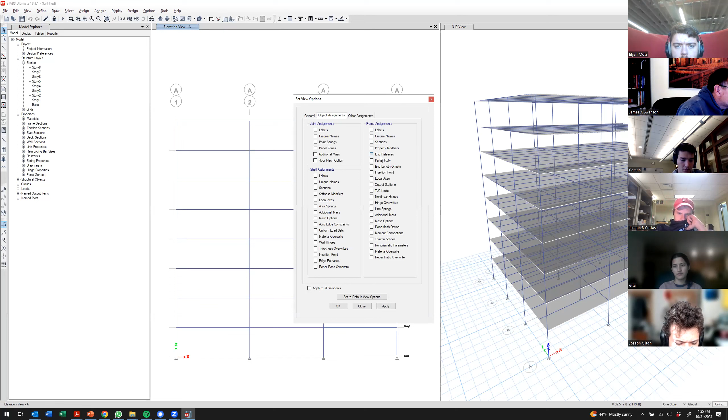Where's the end releases at? It's in here someplace. Right there. So we can show the end releases, and so we have basically a moment release at every end of every one of these objects. And so I could go into assign frame, releases partial fixity, and I can select no releases for those members. And now I have a moment resisting frame defined in that framing line. Okay, and then you could do the same thing and put in a moment resisting frame in framing line D as well.

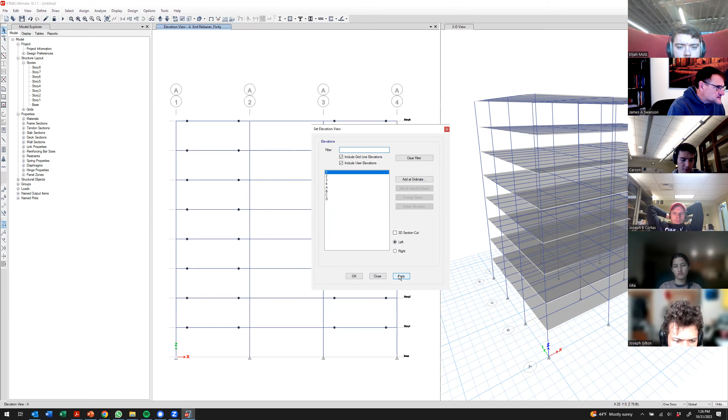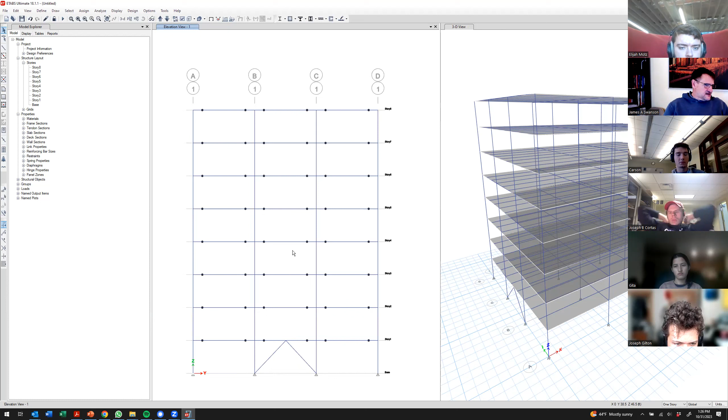We could go in and look at a view of, say, framing line 1. And now I can come in and I can draw braces. Yeah, I should have put a grid line in there. And I could make my brace frame basically that way. A better way to do it would be to put in a grid line B.5, and then you could snap to the intersection of that floor beam and that grid line, and that would be more convenient.

All right, that'll do it for today. So when we come back on Thursday, we're going to shift gears a little bit. We're going to jump into some more matrix analysis and carry it to the next logical step. So we started with trusses, we went to beams. Now we're going to go to a combination of a truss element and a beam element, which is a frame element. And we should be able to accomplish that all in 1 hour on Thursday.